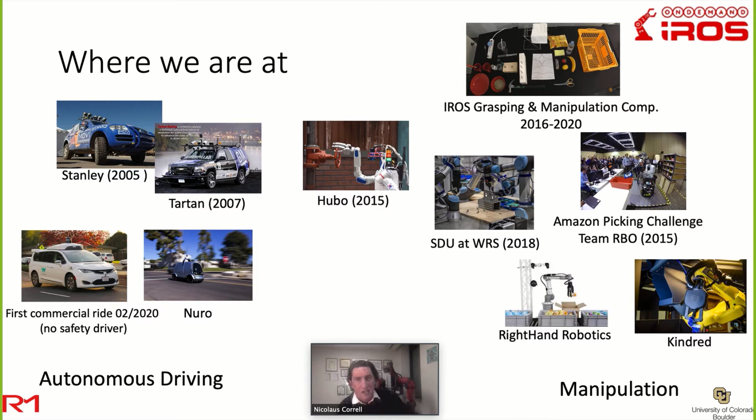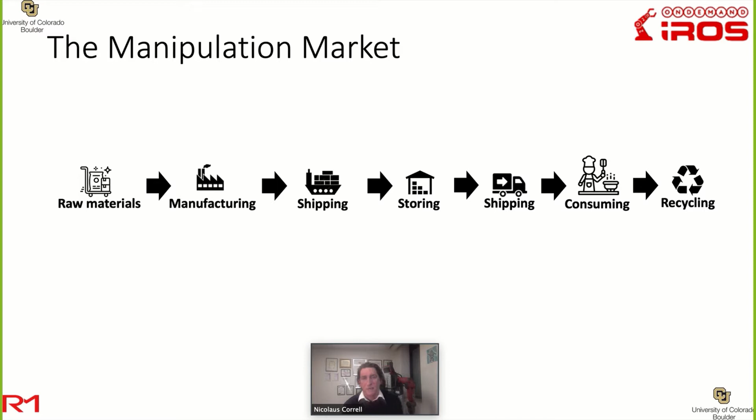The manipulation market is quite interesting because everything is already quite automated. If you think about, for example, a light bulb that goes off in your house, there is a system that would probably know that already. It could order this thing automatically and trigger this entire process of the raw materials being brought to a factory and then eventually shipped into a storage facility. And once you need your light bulb brought to your house, they have to be plugged in, and the old one has to be recycled. Now, all of this is quite automated or could be automated except for the manipulation aspects of it.

So we have companies that are working on that specifically. Since the 80s, we really have industrial assembly, welding and things like this, and it's all very well known. And more recently, we have a new breed of robots that are doing things more autonomously. And here I try to put up a couple of companies right underneath where they are in that chain of consumption. And so now you see there's even robots that can feed people. There are robots that can pick things out of shelves and fulfill an order. There's AMP Robotics here in Colorado that does recycling.

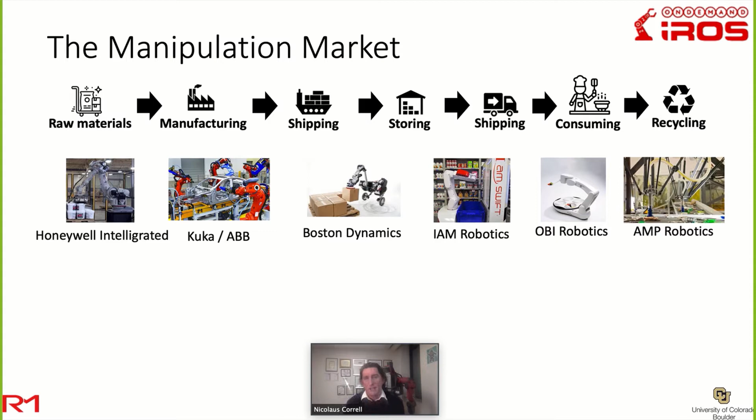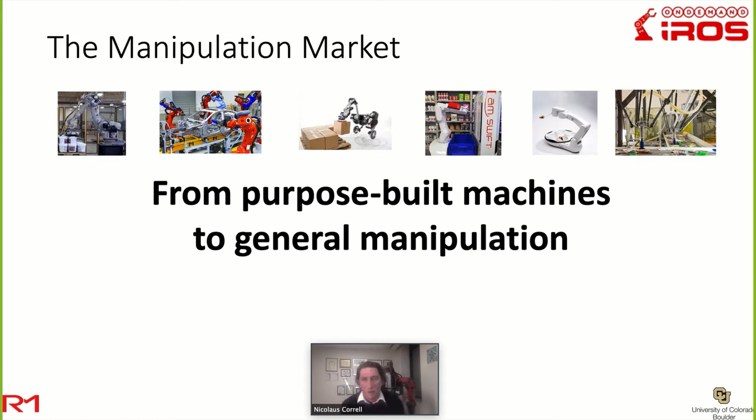But what these robots are still not doing is they're still not really competing with humans when it comes to general manipulation. They are still machines that are purpose-built for their specific application. So I think the challenge for us as a research community is to really get there, unearth that potential, because then you would have a robotic solution that could do all these things much like a human can.

So to understand what manipulation is, most people think about grasping as the problem of finding where to place fingers onto an object, so to constrain it and not let it slip. The actual real challenge is to put these constraints on the object at the same time. So if you think about the screw standing on a tabletop here, we all know how to grasp it with 2 fingers, but if you would close your gripper now, the screw would fall, or worse, it would actually spin out of the gripper and leave the table.

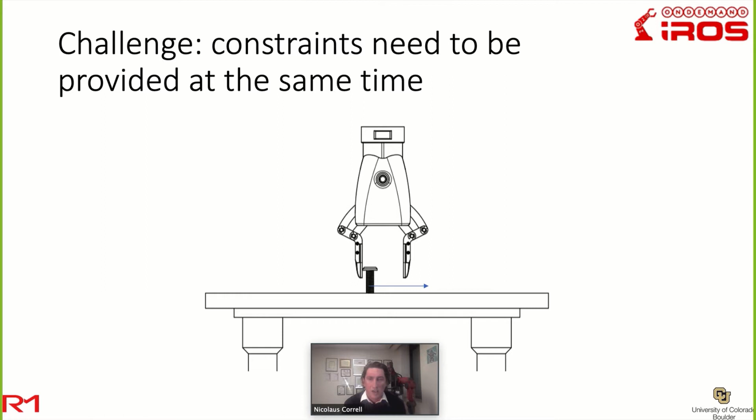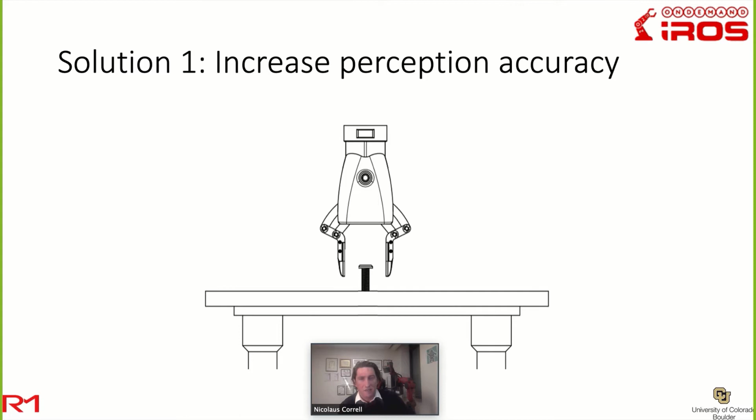So in order to solve that problem, you have 2 options. Either you increase perception accuracy, so you make sure you really know exactly where that screw is, and you position your hand accordingly. If you're lucky and you close your fingers, you will just reach the screw from both sides at the same time. The alternative or complementary thing you can do is you can use compliance. And in this case, the fingers are kind of spring-loaded. That's the best way to imagine it.

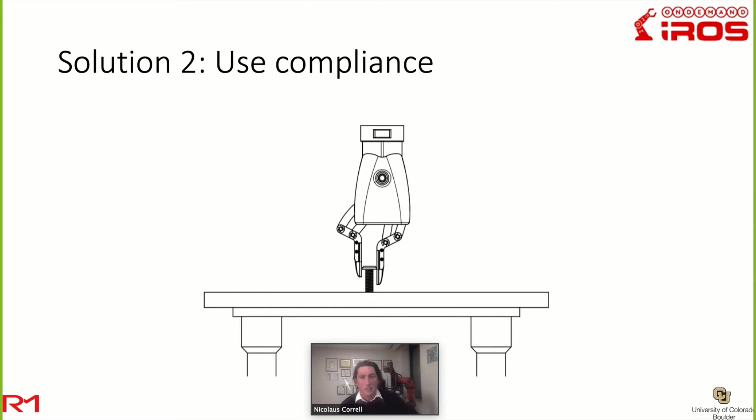And they just keep closing until they hit, but limit the force with which they do so. So if you have very, very sensitive force control, you could imagine to grasp that screw with two fingers without it falling or slipping. So in order to address these challenges, we developed a tactile sensor that can both increase perception accuracy and measure force.

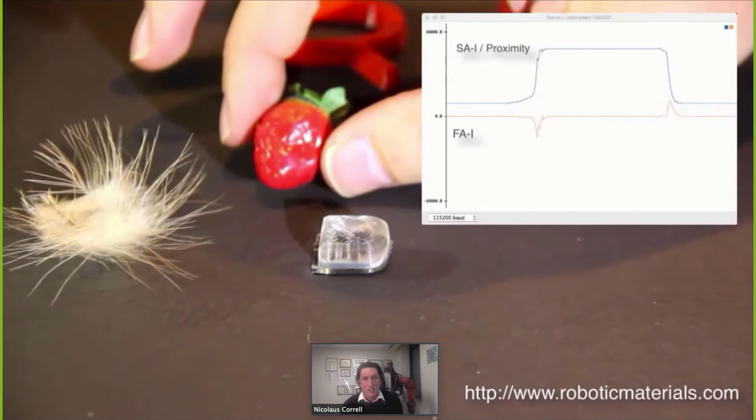So here it is. You see, we press it down, and I label these things with SA1 and FA1, akin to the human tactile sensing system. Now, what you see in the FA1 signal is the actual touch event. So there's a touch and release event, and let me play this again. Whenever the device gets touched, I get these peaks in the FA1 channel. At the same time, I see the proximity as the strawberry approaches in this case. So we were quite excited about this.

Here's how it works. It's an infrared proximity sensor that is integrated into a flexible and transparent polymer of known width. So the idea is now that if I shoot the infrared out, I can get it reflected from an object and measure the distance to it. But I can also measure the deflection of the material when I exert some force. And so this is simply Hooke's law: F equals spring constant times the displacement, which I can measure and from which I can then infer the force.

So here's what that looks like. As I approach my sensor, I get some increasing sensor value. And then there's this point where I touch the object, where I turn it from a proximity measurement into a pressure measurement. And likewise, I can tell once I release the object that the sensor value now should be treated as a proximity value again.

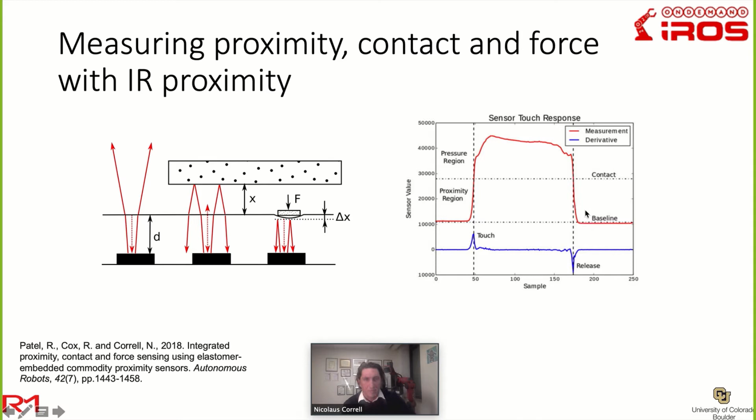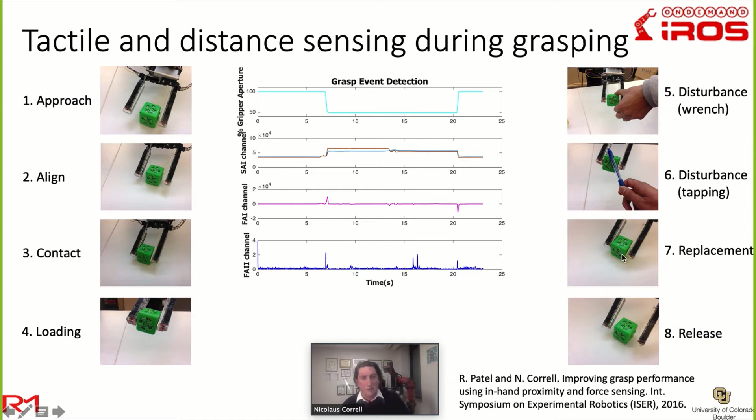So if you think about that in the context of grasping, you can think about using such a sensor to correct your approach and first align with the object, so as to not disturb it too much. Then you can detect the contact event, you can detect loading events, disturbances like wrenching or tapping it, and finally even replacing when you place the object back on the table, after which you would release it.

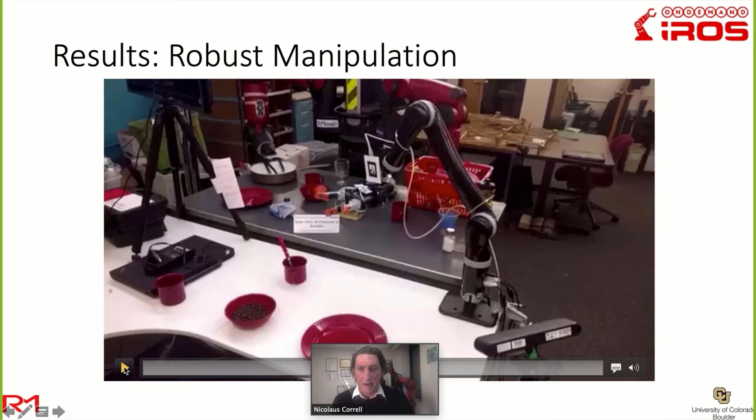So we used this in the IROS competition, I think in 2016, and made fingers for the Kinova hand. And here the idea is that this spoon would actually spin out of control if you would touch it too forcefully with your fingers. And also it is hardly visible in the ASUS Xtion 3D data feed. And so the idea is that we can use those sensors to actually find it and then manipulate it gently, which works very well, as you can see here.

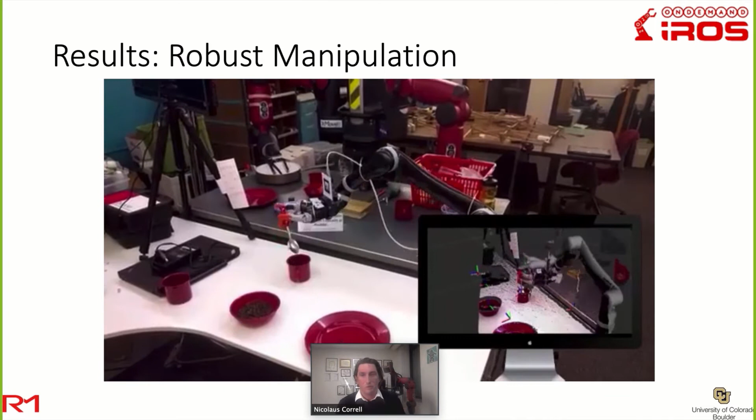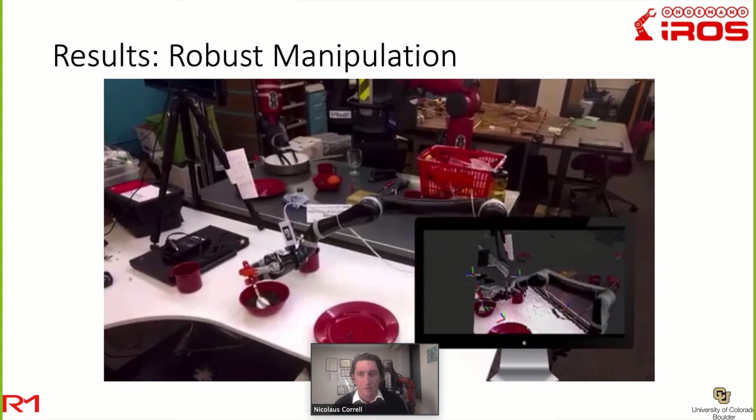Now the gripper grasps the spoon, and it will then do some scooping, where we can again use the sensor to detect the event of hitting those beans. So we got quite thrilled about all of this and thought, well, we finally solved manipulation, and we need to start a company to bring it to everyone.

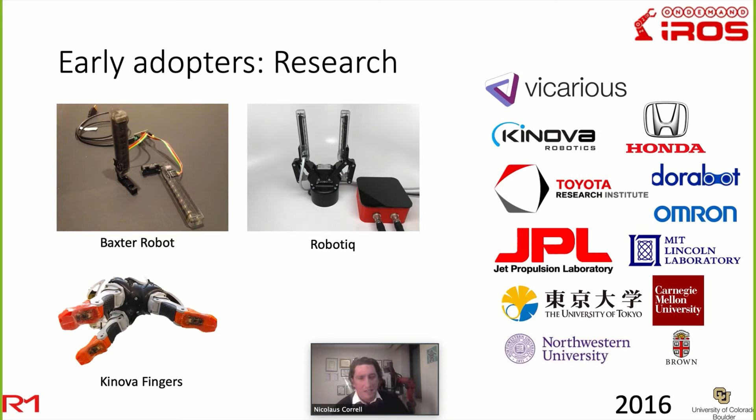And so what we did is we started selling that sensor for the Baxter robot, the Robotiq gripper and the Kinova fingers, and many of you have bought one, and we're very grateful for that because it really moved us forward. But it's also a difficult business to be in to make sensors. So we started the company to do more industrial manipulation things and raised $100,000 from the state of Colorado to the university, allowing us to buy a Universal Robots arm and then exchange a license for equity with the company.

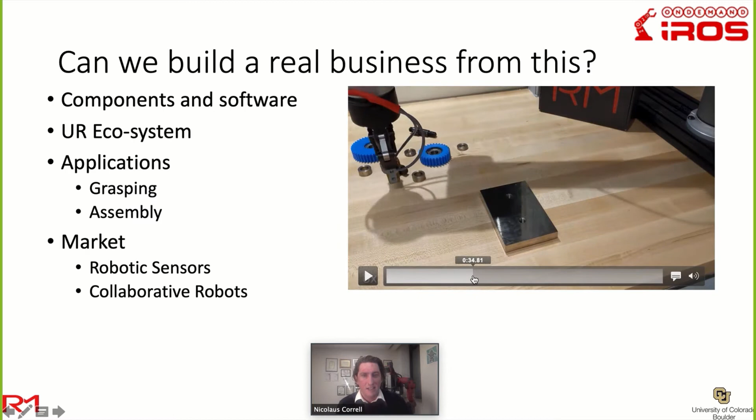So this is the product we came up with. This is an industrial assembly scenario, which is based on the IROS Manipulation Challenge assembly task. And what we've done is we created a URCap, which is a plugin for the Universal Robot, allowing users to use this sensor information in a meaningful way and, for example, detect something lying on the table or detect contact events.

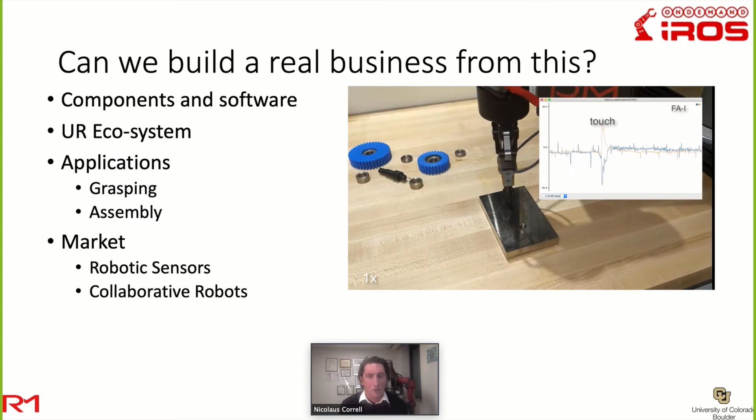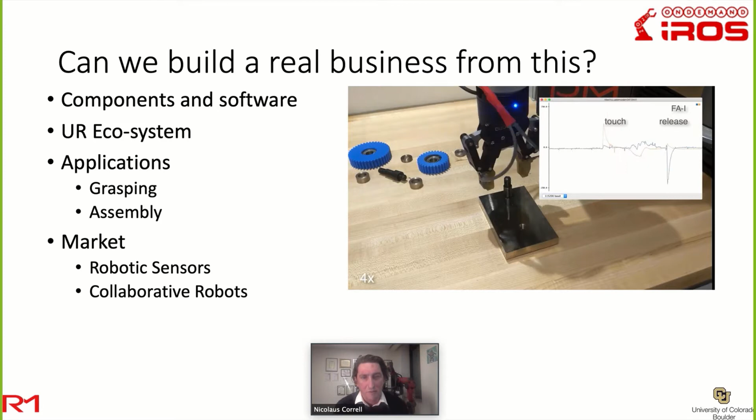So then we programmed this assembly task, and we hard-coded it into the Universal Robot, and I show now what the sensor would actually see, which with reasonable thresholds you can then use to control your process. So here are these touch and release events as I go and grasp and re-grasp the device. Now, the problem with this is the market is relatively small. It's people who own a Universal Robot and a Robotiq gripper and actually want to do these kinds of assembly jobs for other people.

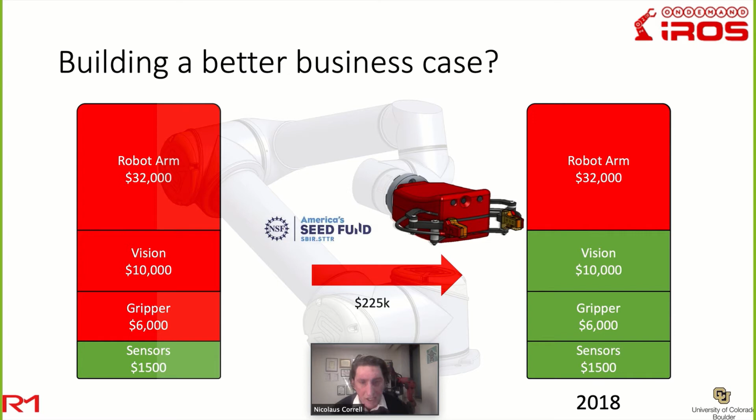There's another problem. If such a transaction takes place, then a lot of people make a lot of money, except us who sell the sensor. So we then went to the NSF, which has an SBIR program, which I can highly recommend to all of you who want to transition your technology, and received $225,000 to create a hand, which we thought will then allow us to capture not only the sensor's market share, but also the cost of the gripper and even a vision system.

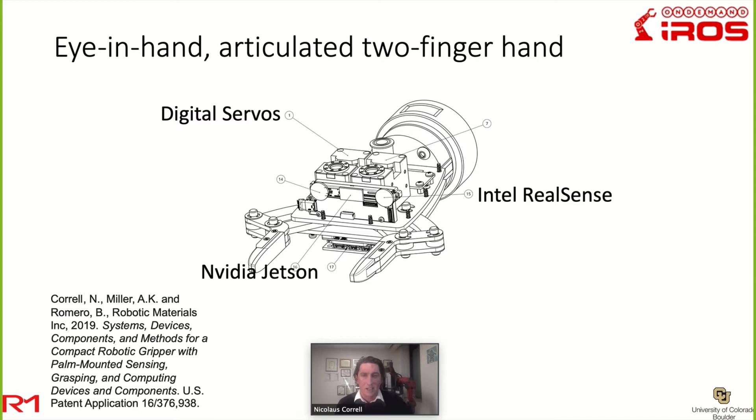So we then hired the first engineer, Austin Miller, fantastic guy, and he built this hand from scratch, designed it, and I would describe it as an eye-in-hand, articulated two-finger hand, which has two motors to drive each of the fingers individually, an Intel RealSense stereo camera, and an NVIDIA Jetson that does most of the control and processing of the information. There's a patent that we submitted which describes the hand in great detail if you're interested in how it works. I'll show you some demos of what it can do.

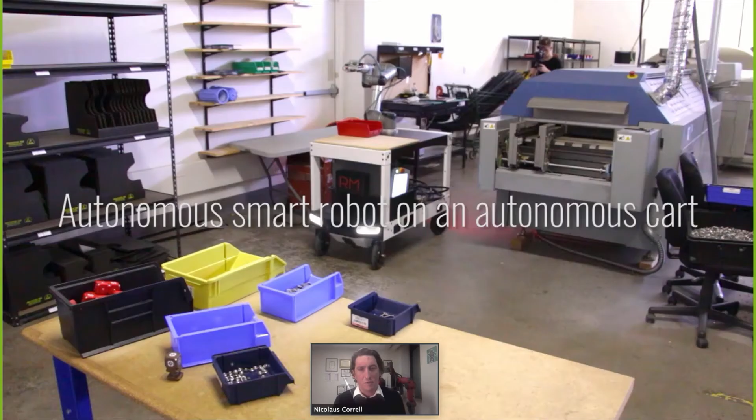So the first video we released was a mobile manipulation demo using the Canvas cart. Canvas Technology was a company in Boulder. It's now Amazon Robotics, and it allowed us to demonstrate approaching a bin without docking, without knowing exactly where the cart is, but with like 10 centimeter accuracy. Then using the onboard camera and processing to detect those screws and grasp them.

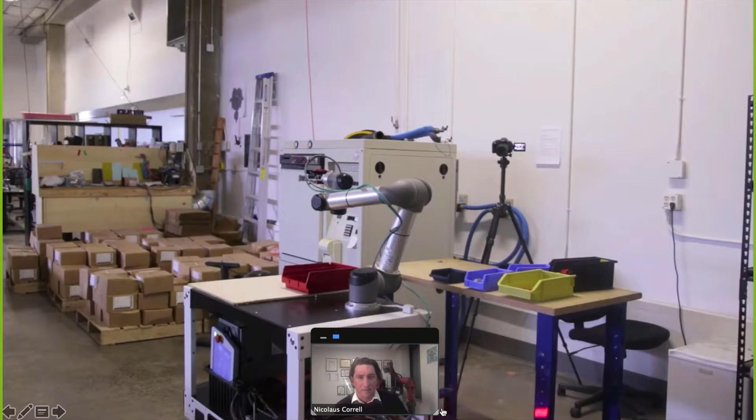So we usually try to make videos where we show a sequence of actions, because then it is clearer that this really actually works, not only once but many times. Now it grasps a belt from the World Robot Summit assembly competition. It then drives the cart elsewhere in our shop and will drop the bin there. Let's fast forward that a little, because this is just driving.

Now it will again use the onboard sensors to look where the bin actually is, and then grasp it and place it. So with that you can create some quite reliable, robust real-world kitting tasks. And I will explain a little more how it actually does that.

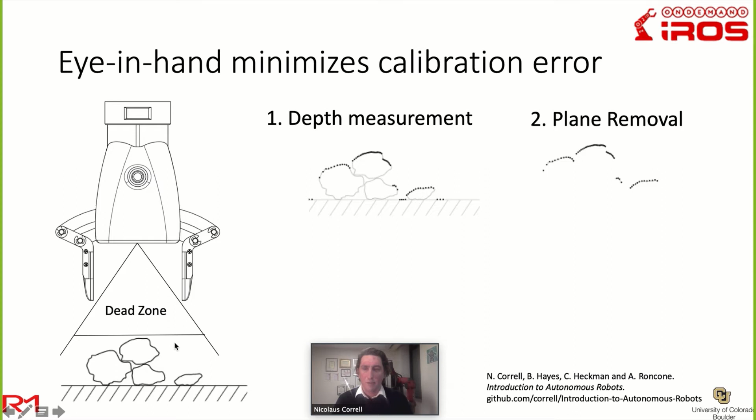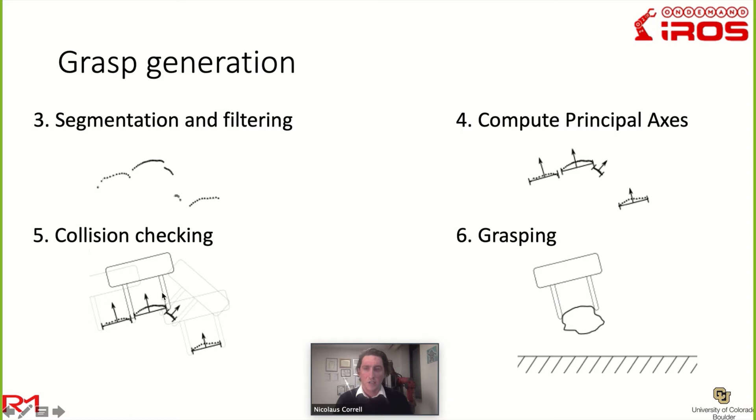So the first thing is, the eye-in-hand is really the key to minimize calibration error. Whenever you have the camera elsewhere, you will have up to centimeters of error, because it's just impossible to calibrate the camera the same way everywhere in your environment. Now, when you look at stuff like this from above, you can approach it up to 12 centimeters. There's a dead zone, but then get a depth measurement, segment and filter the point cloud information, compute the principal axis of the point cloud, do collision check to select the best grasp, and then grasp.

So here's another video on how this works. This is a bin picking application. We use fake fruit because for obvious reasons we can't keep them around for too long. I mention it because they're actually much more slippery than real fruit and also more reflective. This works again quite well. The robot approaches the bin, looks inside, and does what I just described to select the best grasp.

There are a couple of error cases that occasionally happen with this kind of setup. Let me fast forward. Sometimes you might not find an object. You might need to scan the environment. Here it slips, which is due to the slippery objects, but then it will look again and actually grasp it.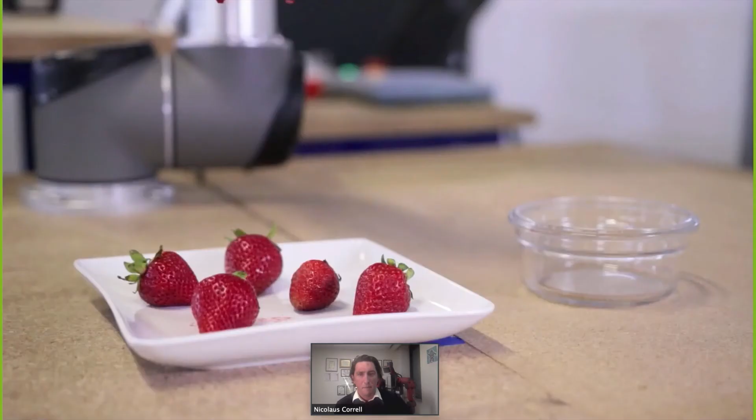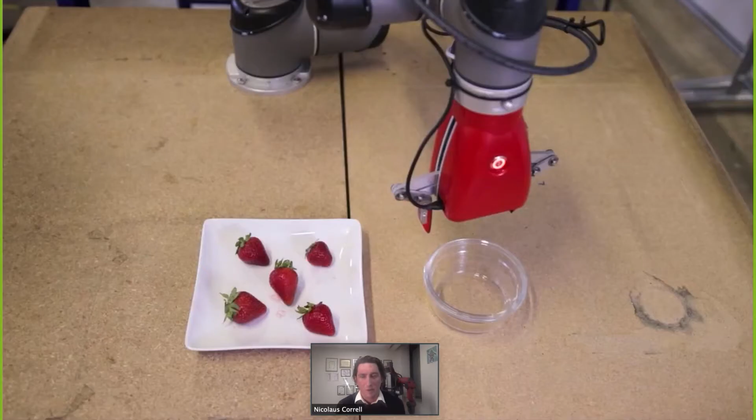So here is an example where we use some real fruits. These are strawberries. Generally, there's this belief that you need soft actuators to do fragile objects. That is not the case. It is sufficient to control the force. And so you see how I can grasp all these strawberries and not crush them.

So to give you an illustration on how this works, the key is very simple impedance control, which we achieve by simply controlling the current of the digital servo motors. And so in this case, the torque that you get is proportional to the maximum current you set.

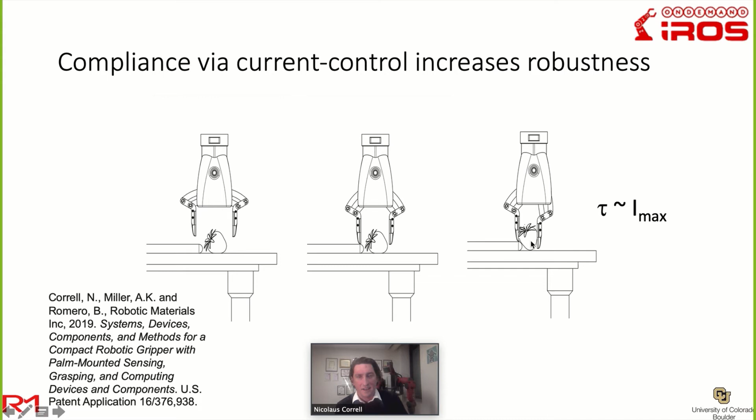If you set that current to be very low, you can deal with situations like this where the gripper gets stuck at an obstacle that you might have not seen. Any normal gripper would now not be able to close anymore. Our gripper will just stop one finger and keep closing the other. And again, the torque is controlled in such a way that the strawberry wouldn't be squished.

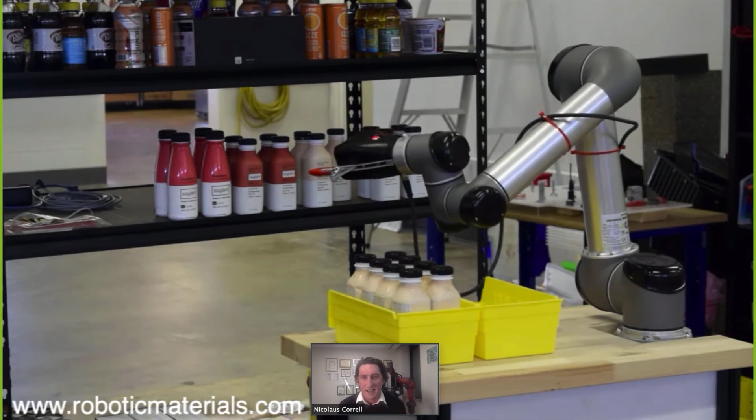So another example of what the hand can do is another mobile manipulation task. This time we have received the phase 2 of our NSF SBIR grant, which allowed us to buy a MiR cart, which works very well, and demonstrate a restocking task. So for restocking, what you need to do is you have to check what needs to be restocked, then take out the original items and put in the new ones, and then put the old bottle in front so that the next customer will take that one.

So this is what happens here. This is all autonomous. We just assume that we know how the robot has to move in order to insert a bottle. So this motion is a pre-programmed motion that we associate with bottles. So we know that we can grasp them at the top and then make that motion, which allows them to pivot. Everything else is autonomous. It looks where things have to be placed every time. It looks where the bottles are in order to grasp them correctly.

And so again, in order to show that this actually works more than once or is actually autonomous, I think the only way really is to show you sequences like this. So I think it will do one more bottle and then replace the old one, which you saw it placed itself. So again, it has to look first where it actually is. Also, this motion is of course pre-programmed. We know that we can push bottles back and create space that way. It's a behavior that is associated with that object. So now it will look again. It adjusted its pose a little bit to grasp and puts in the final bottle.

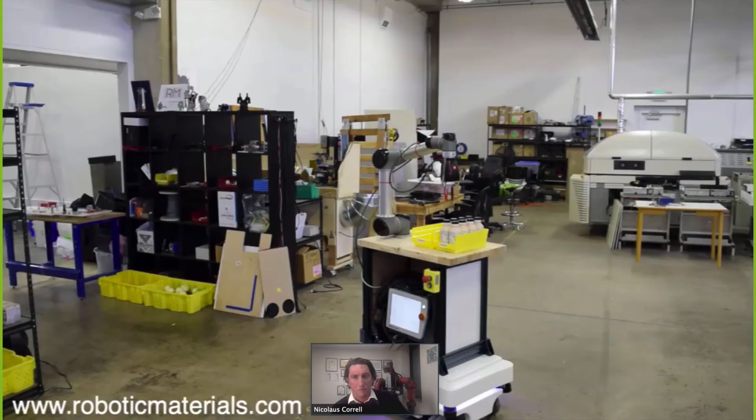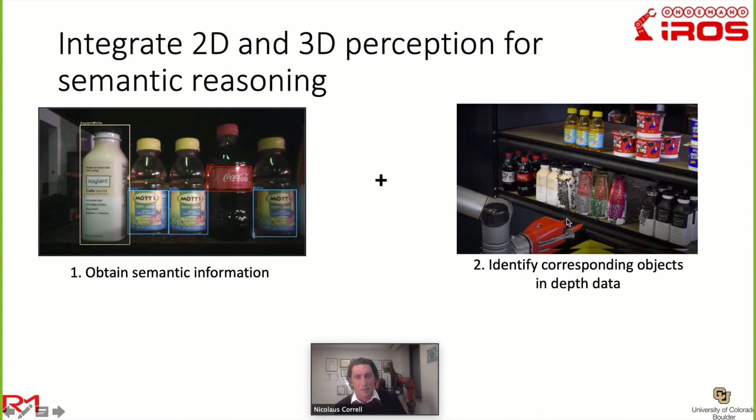So what is new here, or how to do that? The idea is to integrate 2D and 3D perception to do semantic reasoning. So with the RealSense, we not only get the depth point cloud that you've seen, we also get RGB images, which we can then use, in this case, with YOLO, but you can also use Mask R-CNN, which allows you to get semantic labels of what objects are. And now the cool thing is you can use those semantic labels to label your point cloud to know which points are actually belonging to the Soylent bottle and which ones are Coke and so on. And so then I can use the grasping algorithms that I showed you earlier to just focus on that point cloud.

So in order to do this, you need one more thing, which is a force torque sensor. This is a 6-DOF sensor that measures the forces and the torques at the wrist. And once I have such a thing, I can define behaviors like move down until touch and gently touch the surface of the table or the assembly plate.

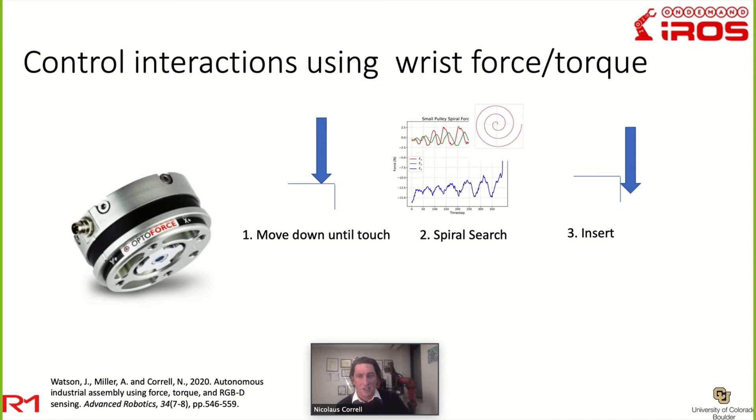Now the question for me, which also guided my talk, is: is this general enough for business? Are we already there that industry can actually adopt these things? And if not, what is it that we need to do? And so we made a couple of observations at the competitions, trying to sell these things and writing papers about them. The first one is that general solutions are very expensive and slow, and specific solutions are always better. So if you're at a competition competing with somebody who made a machine to just insert those specific objects, then that solution will probably be better.

The other thing is general solutions are difficult to configure. So robots need to be truly intelligent so that you can work with them. If you think about the restocking task, I can imagine telling the robot where these bottles are and where to pick them, but very small aberrations will throw it off, and a human worker would probably just look in the vicinity of the location they were given. A robot cannot do that, so we need to really up the general intelligence in order to get to general manipulation.

The second observation we made is that return on investment, ROI, only works on a subset of customers. I asked my LinkedIn followers how much they would pay per month to save $200 in gas. The hyper-rational answer is $200 because you save the environment and you save a trip to the gas station. Many people, though, are not willing to pay more than $50. And a slight majority believes in some kind of fairness in that they are not ready to give someone else the lion's share of their savings.

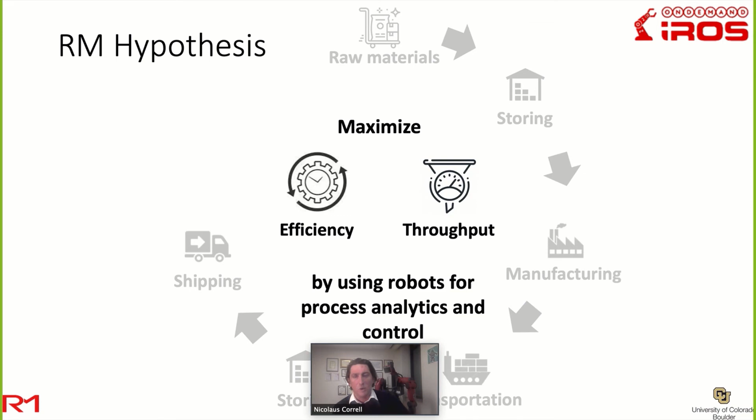So the approach is to look back at all the technology we developed over the last years and really break it into these different components that can help us to do that. First, start with deploying intelligence into the manufacturing line using simple vision products. Then use autonomous mobility to help move products, and only then at the very end use autonomous manipulation to complete the automation cycle.

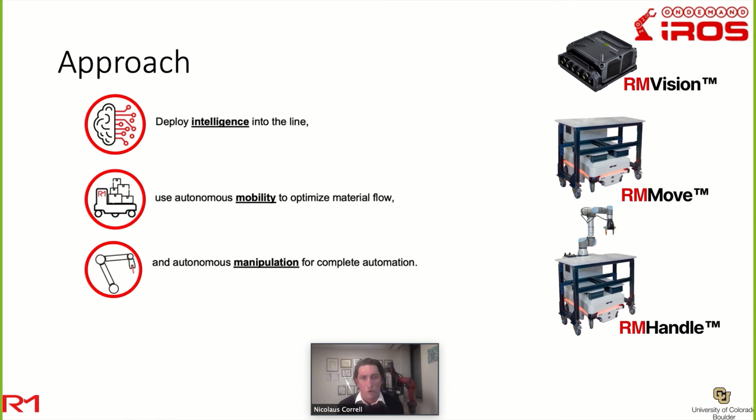To give you some examples of what vision could do: already you could take inventory of things, look into bins, and estimate the volume of what is in there. You can track your floor space, and in manufacturing that's very important because any inventory you have anywhere, or stuff that builds up somewhere, is waste. And you can also find resources like empty carts or pallets or things like that.

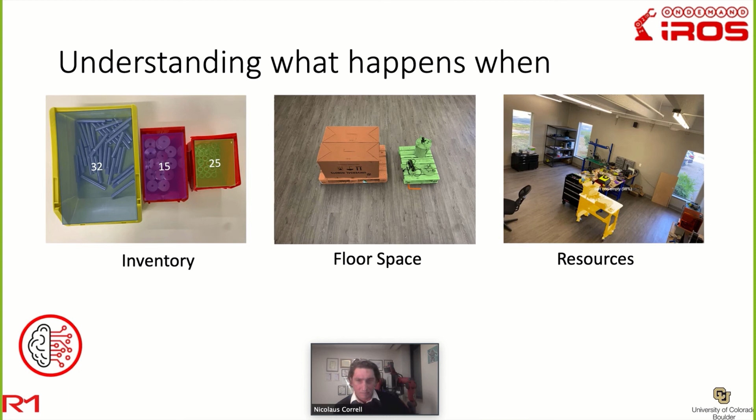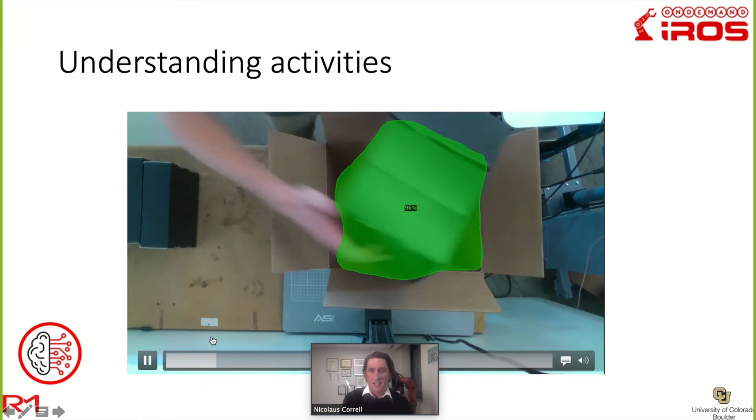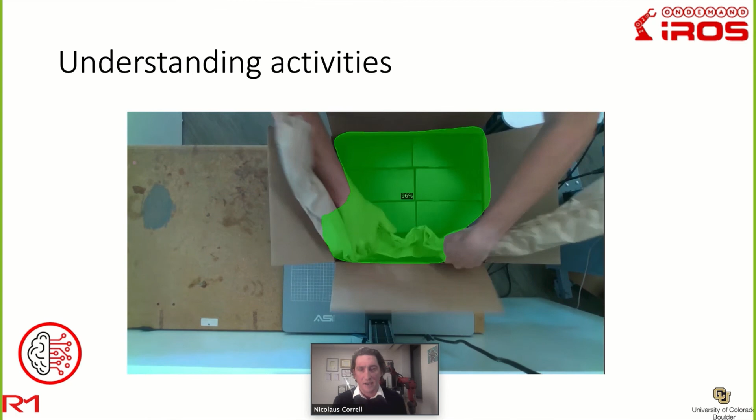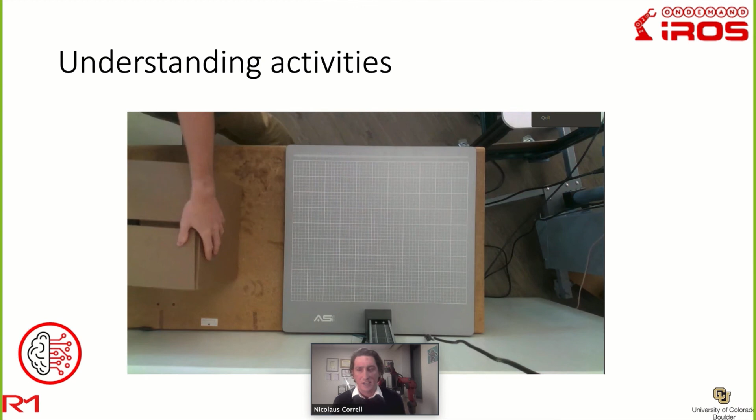The other thing is with vision, and the 3D vision that we developed in this manipulation context, you can understand activity. So in this case, this is a packing task, and the question is: is the box open, yes or no? And this is our accuracy to do that. So even if people put in dunnage, we can still see that the box is still being packed, and once it's closed, we know it's done, and we can get a cart to fetch it, or we can bring the next box or print a label or something like this.

In the job shop, you do an entire batch, then you move it. In the flow shop, you pass on the object immediately. And now, of course, you're trading throughput with mobility. So even though a flow shop is much faster than a job shop, you actually need to move much more of the materials. And this only becomes attractive if a robot does it. Also, you would need to work in parallel, which is something that you could more easily do if some of these stations would be manned by robots and not people.

So what's next? I think what we are seeing is that combining sensing, actuation, and planning can really unlock orders of magnitude in efficiency gains. So even if you just double your throughput in a certain factory, what it could allow you to do is make it efficient enough to not order it from abroad, which would allow you then to save on the shipping and allow you to do a more lean process in which raw materials are directly turned into products and shipped to the consumer. I think the technology and external drivers are in place.

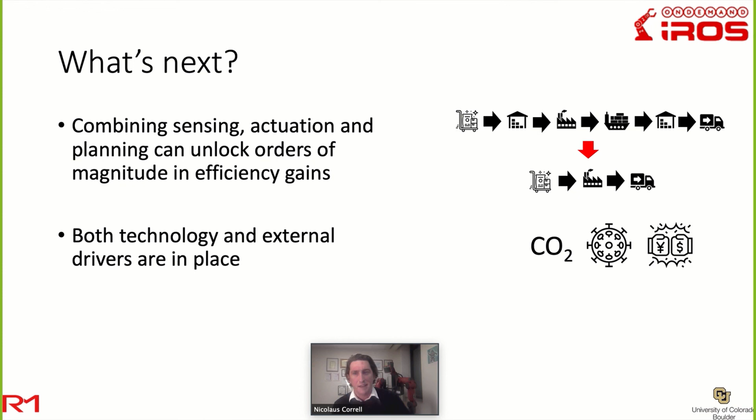We have global warming. We do have COVID-19, which has changed how manufacturers think about workforce and supply chain issues. And we do have tariff wars, which make it more attractive to do things in a more localized manner. The question is, what is the research that we should do? And so I would like to close with 3 ideas on where I want to go with my research.

So the first one is, I think we have to resuscitate classic AI expert systems and planning and semantic reasoning. If you think about learning to woodwork, you would get a book about woodworking, and you would maybe watch videos about woodworking, and then you would eventually start trying it yourself and do some experiential learning. Right now, learning is fully focused on experiential from-scratch learning. Instead, I think we should use deep learning to ground rules and deep reinforcement learning to ground controls. But we need new learning paradigms to deal with discrete representations and blend them with those continuous ones.